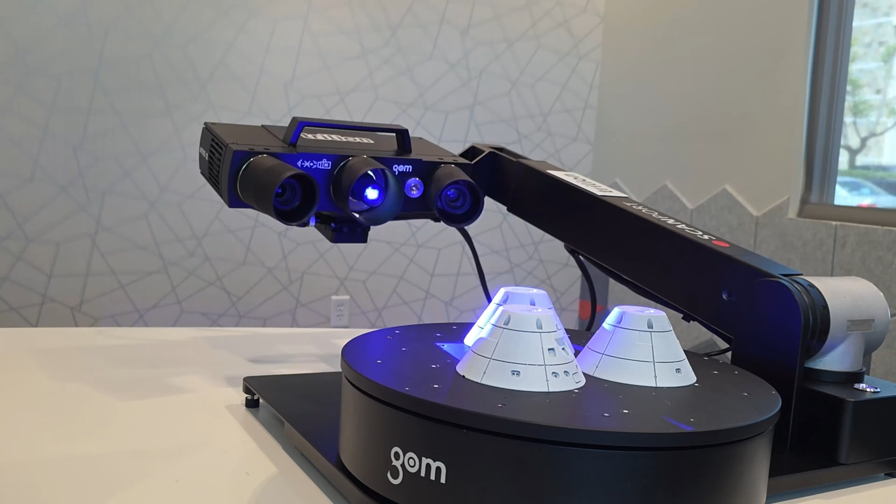Today we want to talk about scanning, specifically automation and scanning. In today's fast-paced manufacturing environment, whether you're in aerospace, automotive, or medical, time is one of your most valuable assets. We're going to look at a way to reclaim that by moving these processes to automation, from manual data capture to a semi-automated precision capture.

I want to give you a little background about Trilion as a company. Trilion Quality Systems was founded in 1998 by our founder, John Tyson. Our primary headquarters is located at the King of Prussia office outside of Philadelphia, but we have satellite offices all over the country, including the Great Lakes office and one in Seattle. At Trilion, our footprint spans the most demanding industries, from aerospace and defense to automotive and medical device manufacturing and materials. We try to help our customers solve their most complex engineering hurdles with a variety of different tools.

All of our optical metrology tools are completely application agnostic. We really don't care if your material is metal, composite, or biological, if the environment is a clean room, a high test heat cell, or a pad for an engine test fire. It doesn't matter, we will still be able to offer valuable insights with our methodologies.

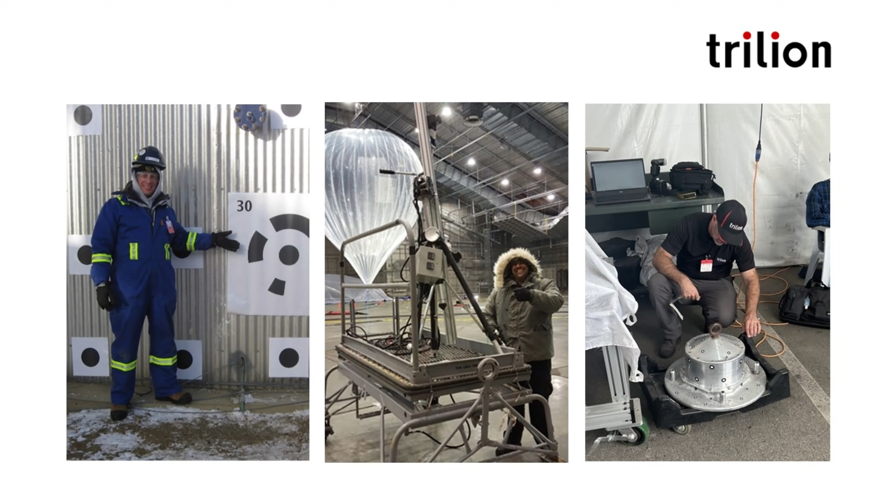In this case, a Trilion engineer will actually come on site with a measurement system, or they can use the customer's measurement system, and make the measurements on behalf of the customer, then provide the insights in a report with the data afterwards. This is a really useful setup for customers who are new to optical metrology and don't have the insights and training yet to get to the point where they can do it themselves.

The other way is with training and education. We really believe in empowering our customers as much as possible with everything they could need to get the most out of their systems and get the quality data and insights they're looking for to help solve their problems.

ZEISS has a very wide range of optical metrology-based tools. Today, we're going to be mainly focused on the scanning portion, but there are other areas that we focus on at Trilion, Aramis being one of them, which is the optical strain measurement technology.

Argus and TRITOP are both DSLR-based technologies. We see Argus used a lot for sheet metal forming analysis, often in the automotive industry. TRITOP is an optical CMM where you're creating a large point cloud through a large amount of images taken from different points with the camera.

CT scanning is an area that ZEISS is very active in. They come from large volume to very small volume, so it just depends on what the application necessity is.

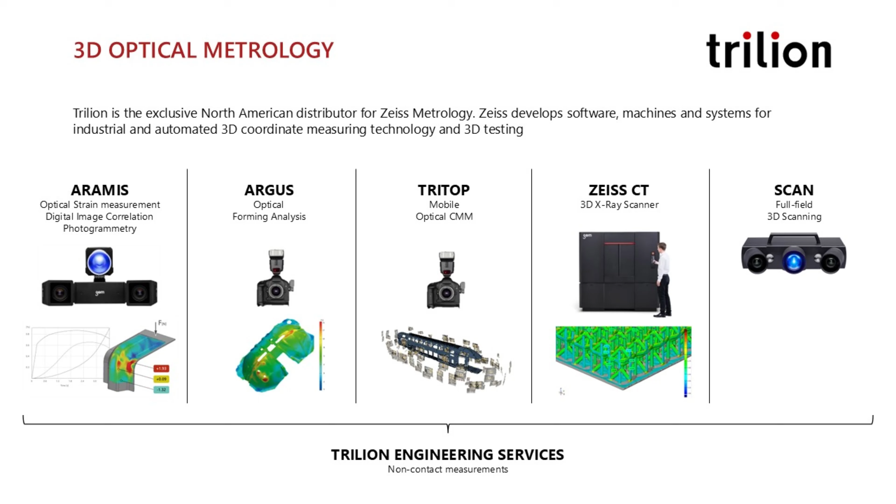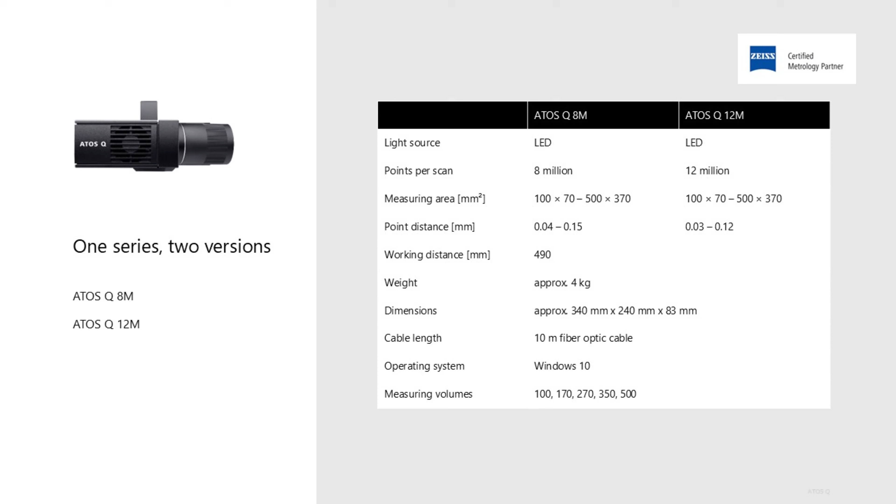The sensor we used for pairing with the ScanPort was the ATOS Q 12M sensor. This is the spec sheet. ZEISS also makes the ATOS Q 8M version. Both are excellent scanners for the half meter and under volume.

For the demonstration, we're going to be using three slightly different Artemis capsule models. Each was 3D printed with geometric variances from the others, so as to highlight the system's capability of differentiating those with the scanning.

With the capsule secured on the platter, we can initialize our measurement series in the software.

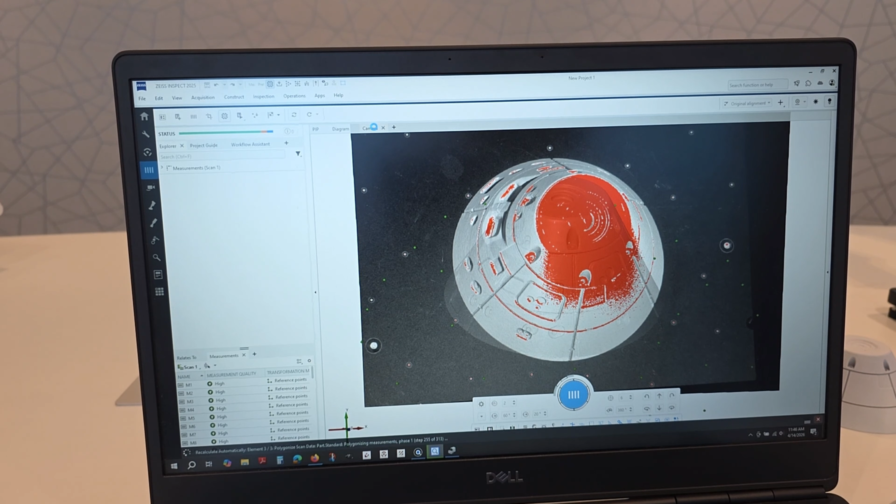As the sequence begins, the ATOS Q projects high-resolution blue light fringe patterns onto the part. The software automatically tracks the table's position using the integrated reference points, stitching each individual measurement into a global coordinate system in real time as it's doing this.

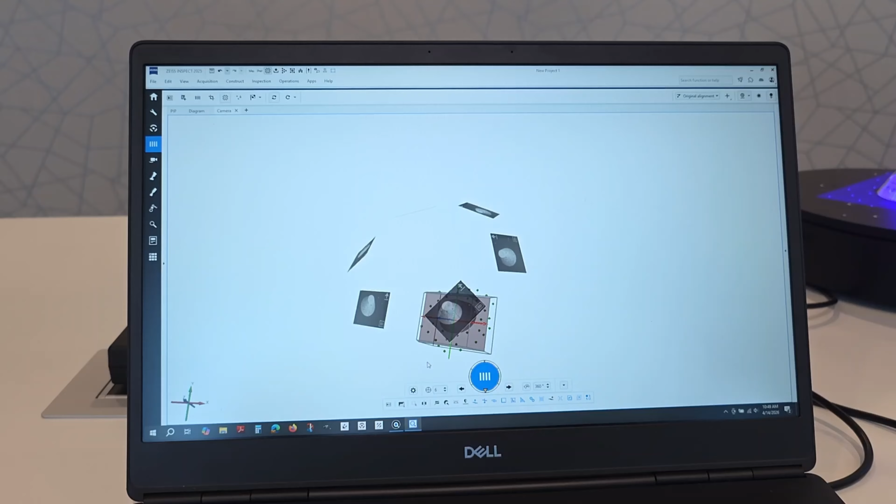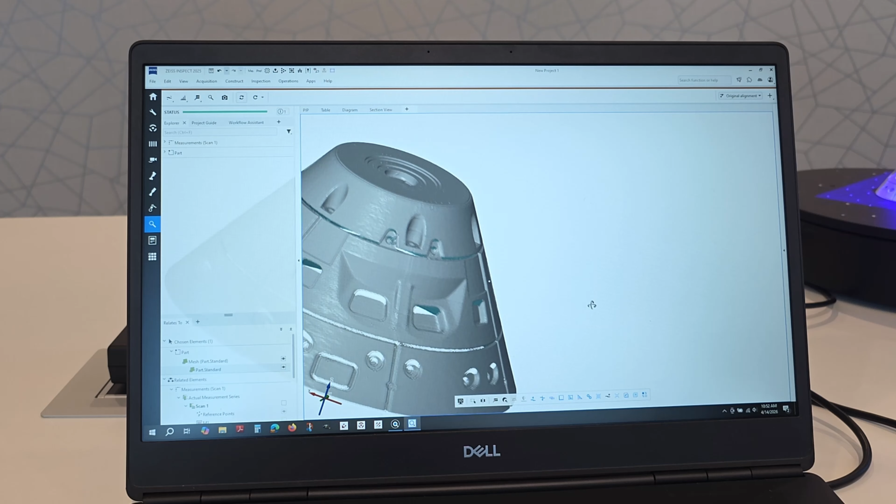Once the automated rotation sequence finishes, the software processes the raw data and instantly stitches all the individual views together into this clean, high-resolution gray mesh that you see on the first capsule. Viewing the part as a shaded gray mesh allows us to visually inspect the quality, and you can see how cleanly the Q captured all of the geometric details. All in all, not a bad scan.

With just the pairing of the rotation table with the scanner on the tripod, with basic automation, you have a great measurement coming out of that. But in order to get into the higher efficiency and higher throughput workflow, we want to bring in the ZEISS ScanPort. This is a new tool they have introduced.

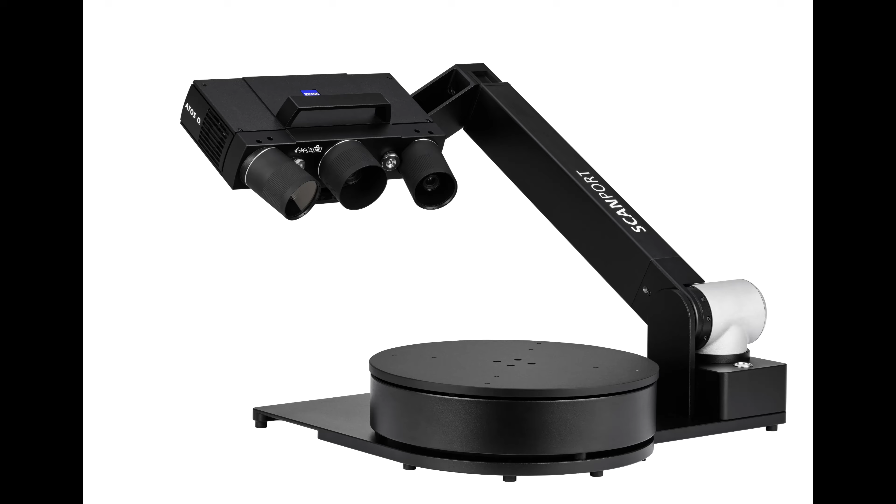This is a compact semi-automated system, and it brings three-axis desktop automation directly into the workspace. By combining the motorized rotation table and the motorized arm on the ScanPort, the arm moves up and down, it tilts, giving you the full three axes of motion. It moves the sensor to pre-programmed distances and angles automatically, and completely removes the need to manually build fixtures or angle the part that's being measured.

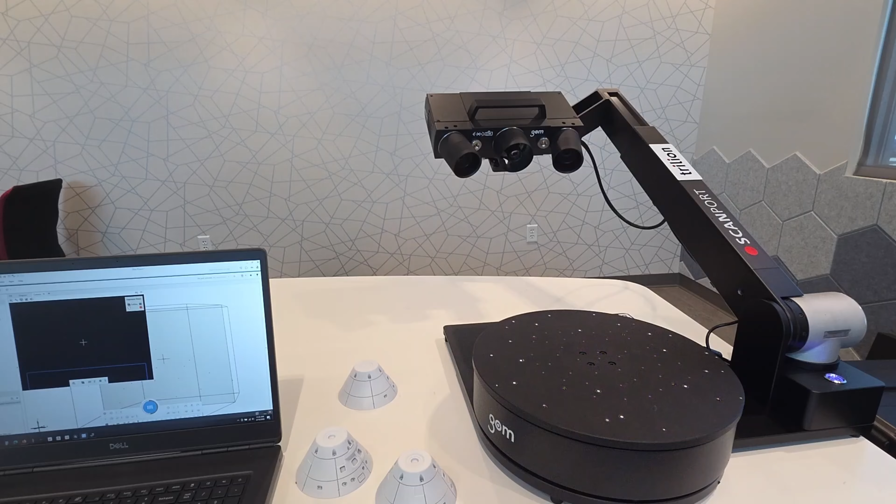Before introducing the first part to the workspace, we're going to create a coordinate map with the reference targets on top of the rotation table. The ScanPort automatically executes a three-axis motion path, moving the sensor through optimized tilt angles and heights. By scanning the empty table first, the system identifies and registers the exact spatial coordinates of each reference target without any obstructions from the part.

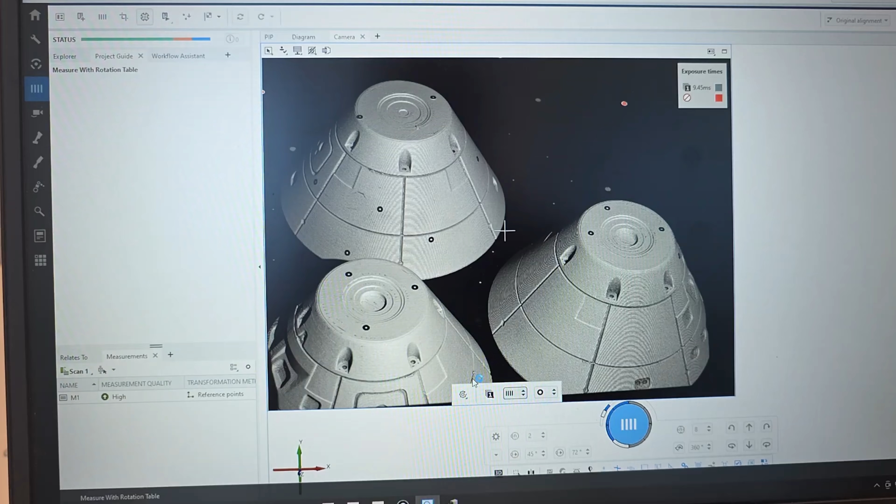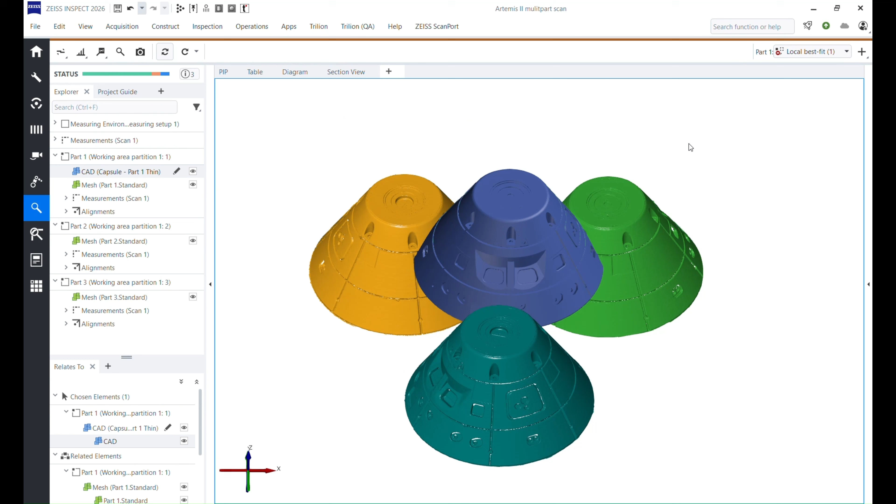Once we have all of the scanning completed of the three parts, we can begin to bring the meshes into the inspect space, using the STL files for each of the individual parts. Once the import is complete, the software designates the master STL file as our nominal baseline. With our reference data and all of our scan components successfully loaded into the same project workspace, we're ready to move directly into the part alignment.

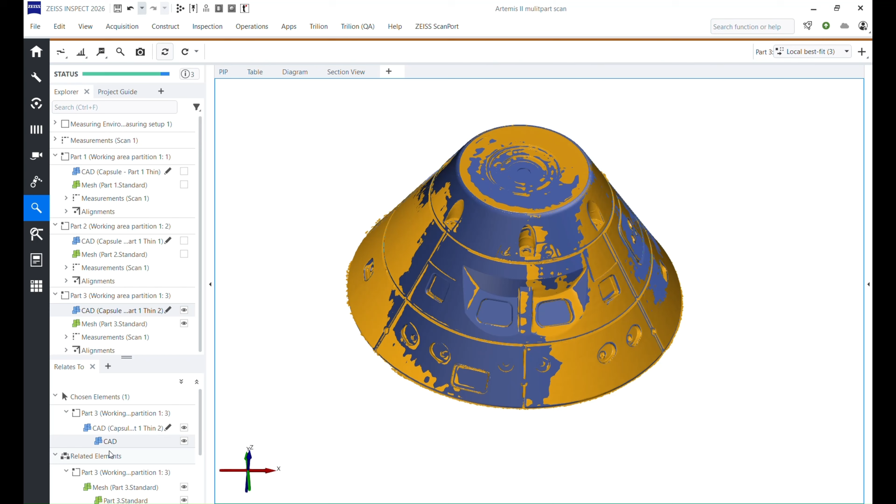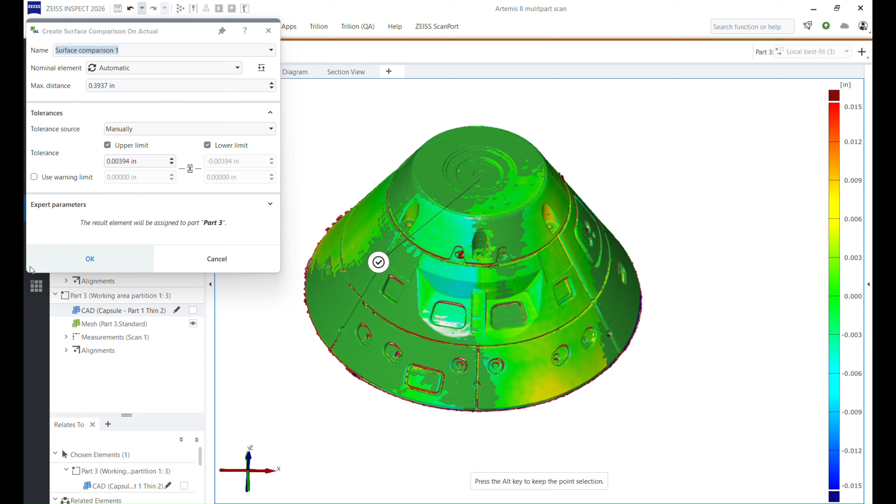With the alignment locked in, we can visualize the geometric differences between our scan part and the CAD. With our best fit alignment locked in, we can visualize the two meshes overlaid on each other, and now we can begin to add our deviation labels to the surface points of interest.

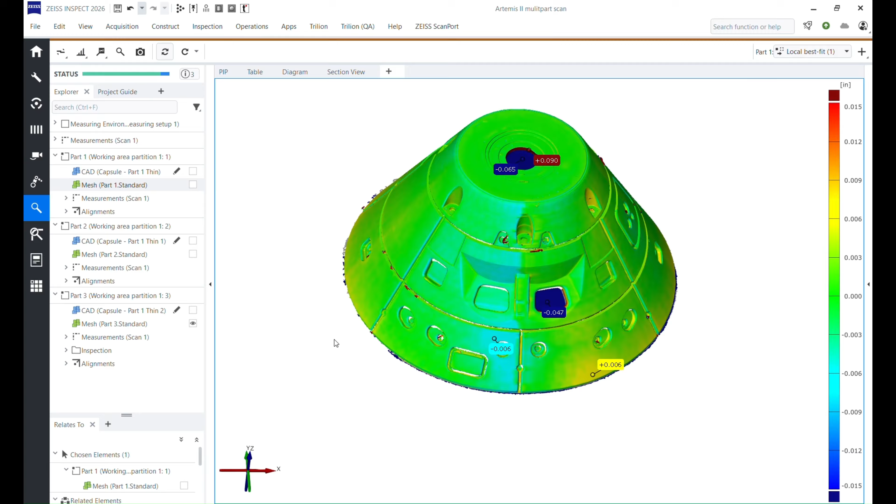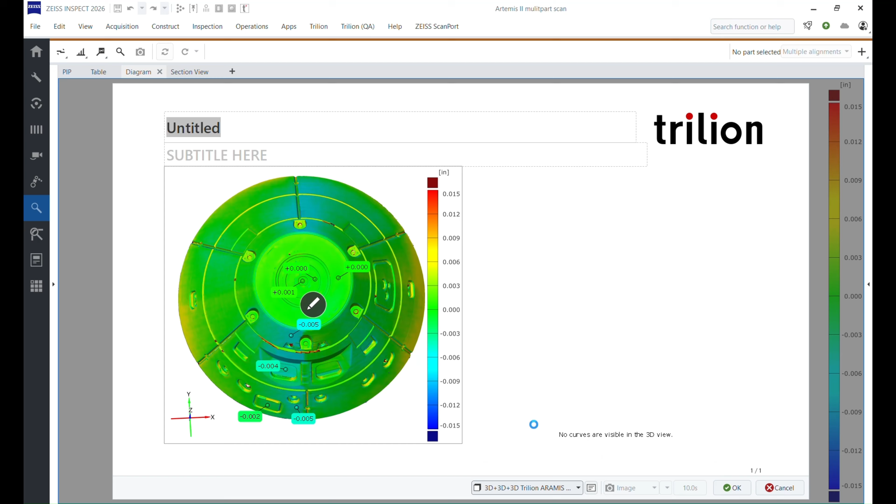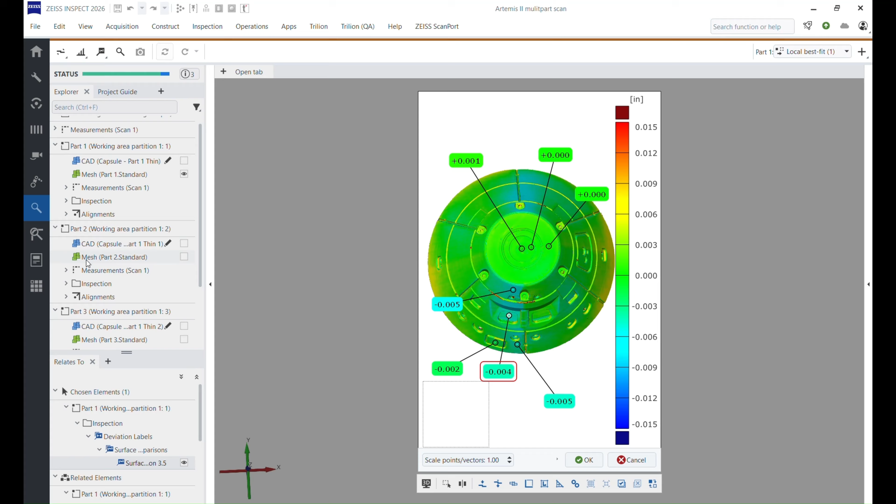Now that we've covered the topic of the ATOS Q used with the ScanPort for automated scanning processes in that context, let's talk about the T-SCAN Hawk 2.

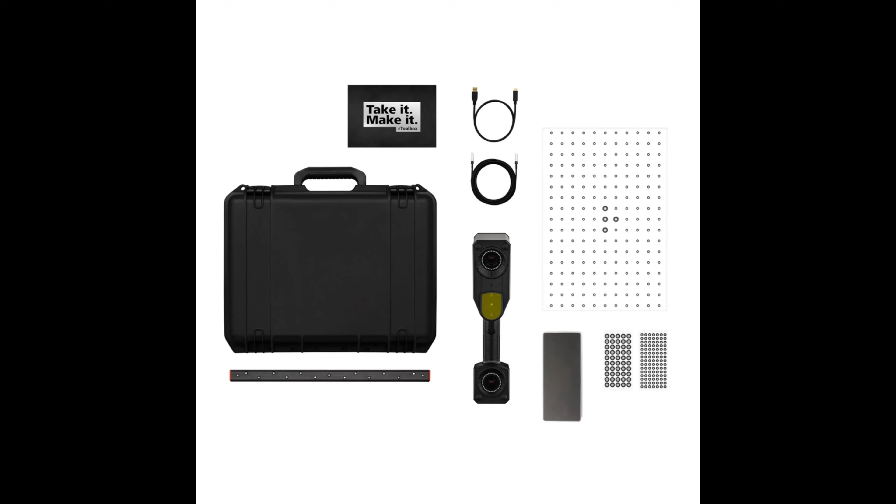This is a handheld laser scanner brought to the market by ZEISS. It's designed as a portable handheld 3D laser scanner, rated in volumetric accuracy down to 0.02 millimeters. This is a wired connection, but the weight of the sensor itself is under a kilogram, so it's very easy to move around for portability.

The Hawk 2 has a couple of really interesting features in that it is capable of doing photogrammetry, and for that, included is a pair of scale bars. Also included is the calibration object standard that is used for calibrating the sensor itself.

The calibration process is very straightforward. It's 8 image sequences that you take with different positions. It's not possible to calibrate incorrectly — it won't allow you to progress to the next step in the software. It's one of the really great benefits of working with ZEISS tools, that the calibration is very trustworthy.

To get further into the details of the T-SCAN Hawk, I'm going to bring on Jerem Hatch, who is one of our senior applications engineers for the West Coast team.

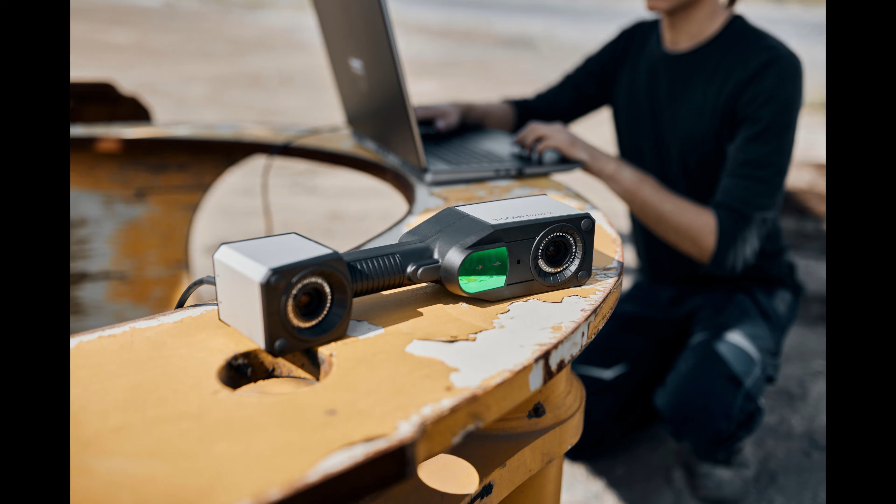For this next section, my name is Jerem Hatch. I'm a senior applications engineer working with Walter on the West Coast, and I will be giving a hands-on demonstration using the ZEISS T-SCAN Hawk 2 in the ZEISS Inspect optical 3D software.

First, with a new instance of ZEISS Inspect Optical 3D open and with the T-SCAN Hawk 2 plugged in and powered on, I will first check our connection. Next, I will start a new project, and as you can see, the software automatically opens the T-SCAN Hawk 2 workspace on the left side of the screen.

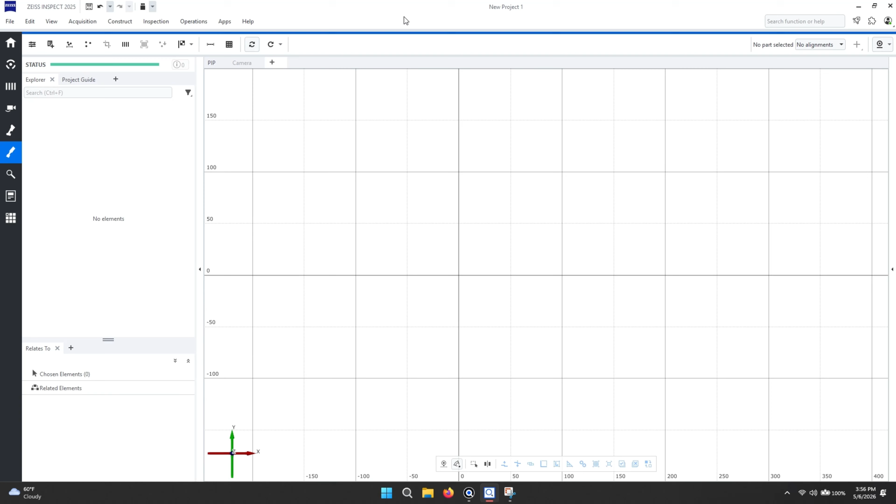The back of the T-SCAN Hawk 2 has 4 physical buttons that can be pressed to navigate through a predefined kiosk mode. To initiate the kiosk mode, I will initially press the right arrow button while in the new project. This mode simplifies much of the software interface and starts to guide the user through the scanning process.

Using the arrow buttons on the back of the unit, I'll start by selecting the type of scanning template. In my case, there are no reference points on the propeller sample itself, but there are points around it, which we will use for the scan. You can see some of the other options, including something called satellite mode for large parts. I can also choose the initial point spacing that will be used for the scan mesh.

Choosing this template, we can see new options available, including the option to use the hyperscale bar included with the system for a quick recalibration if needed.

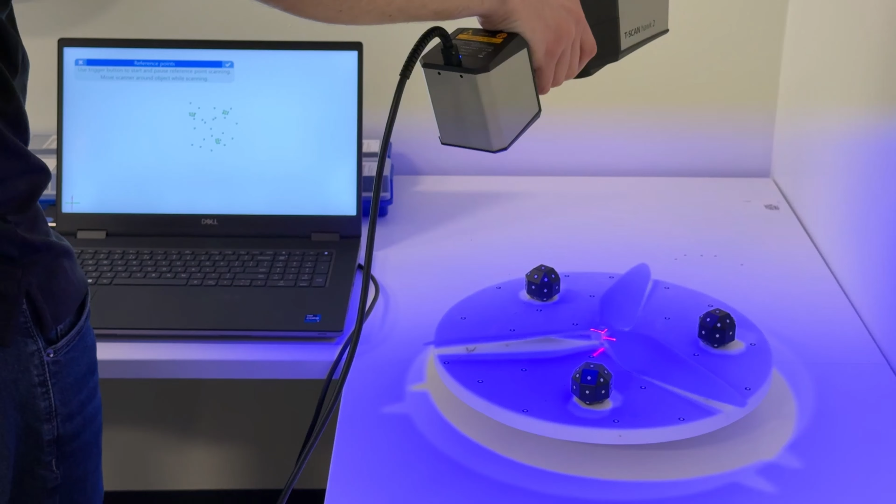We need to capture our reference points, which are the points currently on the rotation table and on the monuments around the propeller. I'll enter the current temperature of the sample and click the trigger button once on the T-SCAN Hawk 2 to initiate the point cloud scan of the reference points. You can see that the T-SCAN Hawk 2 projects two laser lines that overlap to form a cross when at the center of the measuring volume. This is the distance at which you will typically scan.

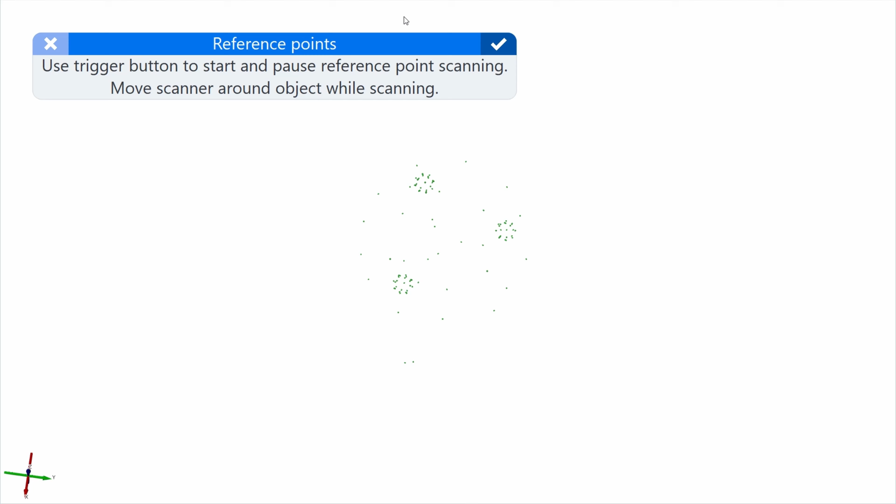Once I collect all the points, I can click the trigger button again to stop, and the right arrow to save that point cloud. I'll then be prompted to define a background plane, and in my case, the reference points on the turntable will make a nice plane to define where my scan area should stop, so I limit the amount of background data captured by the scan.

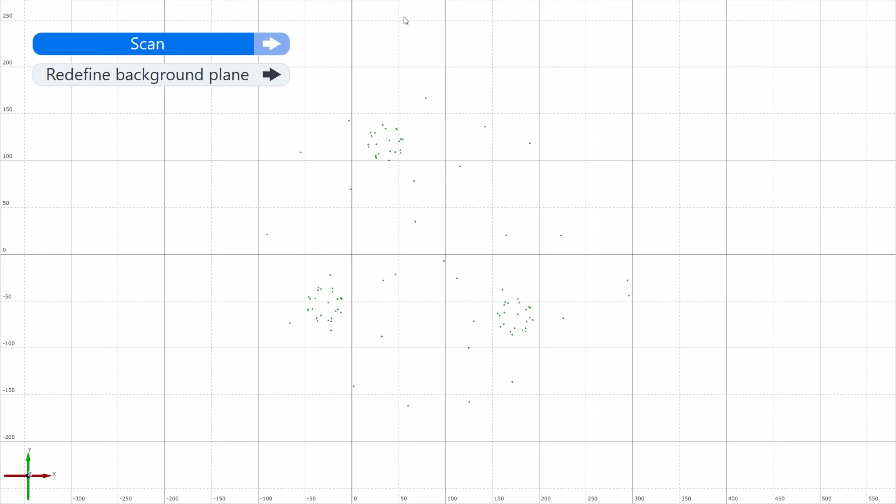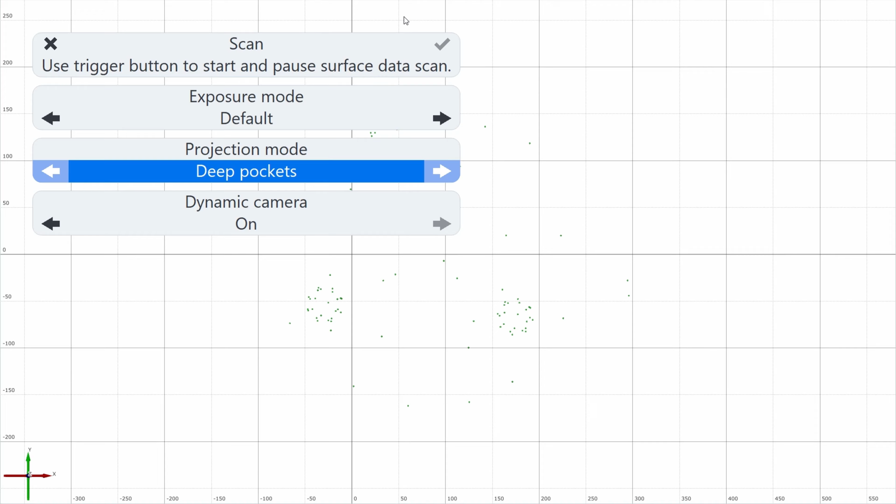Next, I'll move into scanning, and here you can see a few different options: one for exposure mode, which has a default setting, one for dark or shiny surfaces, and another for bright surfaces. Next is the projection mode, typically set at default for surface scanning, and also an option for deep pockets such as through holes for bolts or other cavities. You can typically scan depths of about three times the diameter of the opening. The last option is the dynamic camera, which gives you live visual feedback of where your T-SCAN Hawk 2 is looking relative to the position of the part.

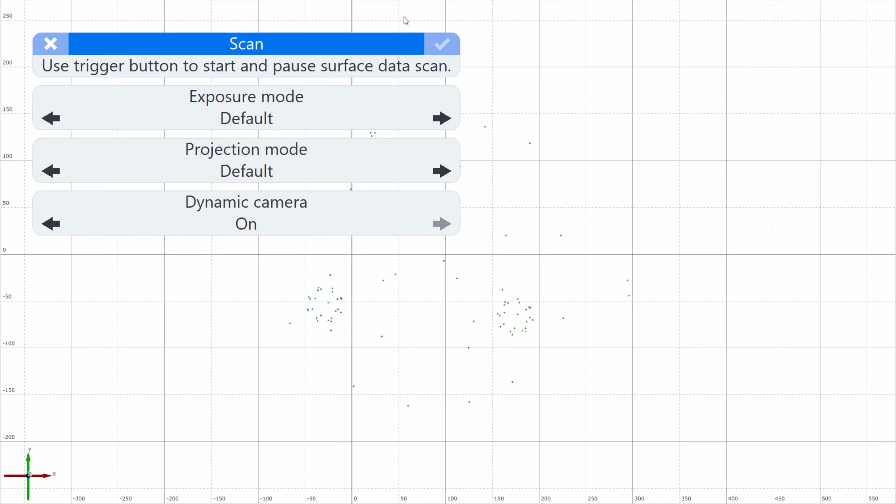Next, I'll move up to scan, and when ready, I'll press the trigger button once to begin scanning. You can see the laser projection lines of the T-SCAN Hawk 2 and the current state of the mesh in the live view of the software. I'll move the T-SCAN Hawk 2 slowly around the part, building up my mesh until I have the appropriate scan density required for my analysis.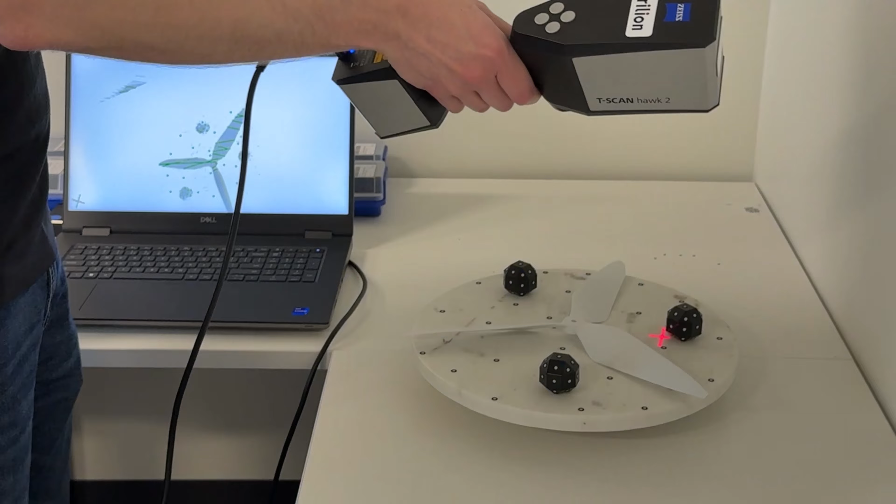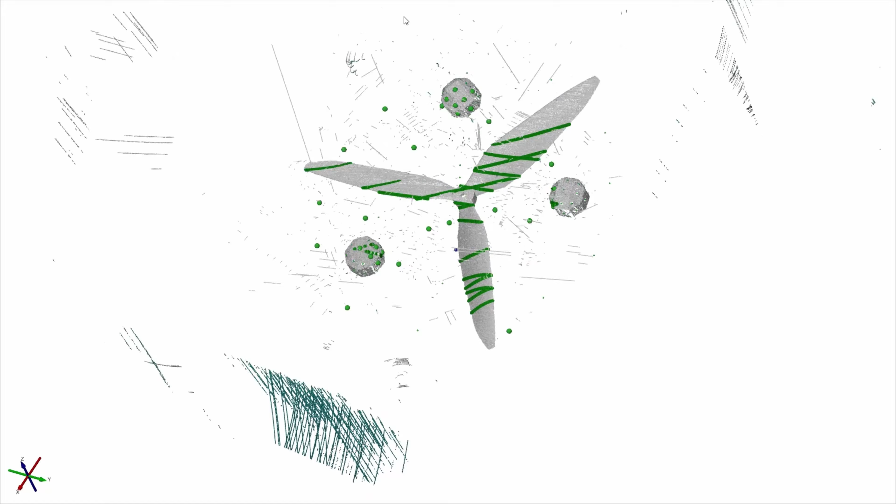You can see a few scanning artifacts from the background are still being picked up. Once I complete my scan, I will trim those out of my project. Now I'm going to use the Deep Pockets projection mode to try and get some more scan coverage inside of the attachment hole of the propeller.

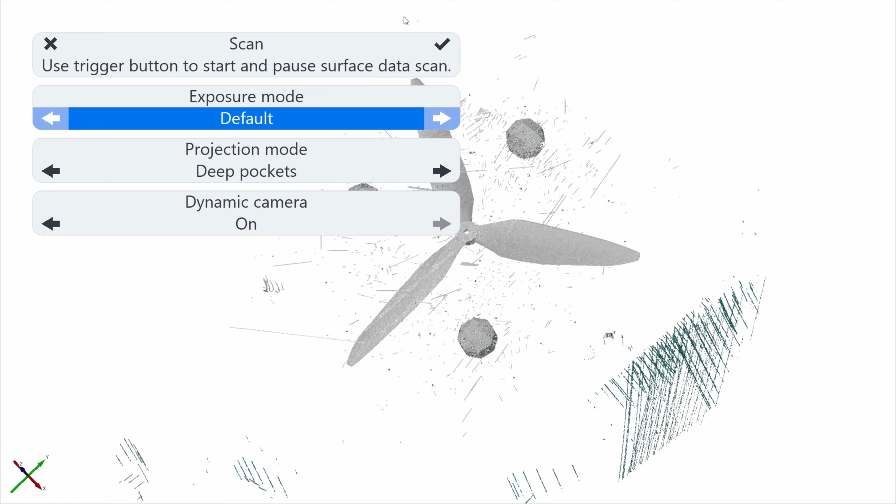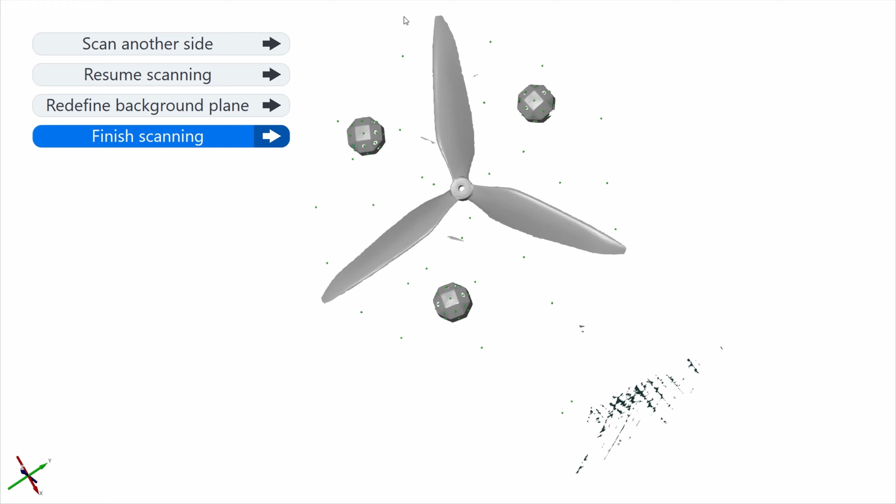Once I'm happy with my scan, I can use the right arrow on scan to finish. Here you can see I can either choose to scan the opposite side of this propeller, resume my current scanning process, redefine my background plane, or finish the scan. I'll go ahead and finish my scan, and you can see I have the option for post-processing this mesh, polygonization, with a few different options.

Here I'll use standard, and I'll choose to fill any of the reference points locations with mesh data. Once the polygonization is complete, I can again scan another side, resume scanning the initial process, redefine my background plane, or continue with the inspection in the software.

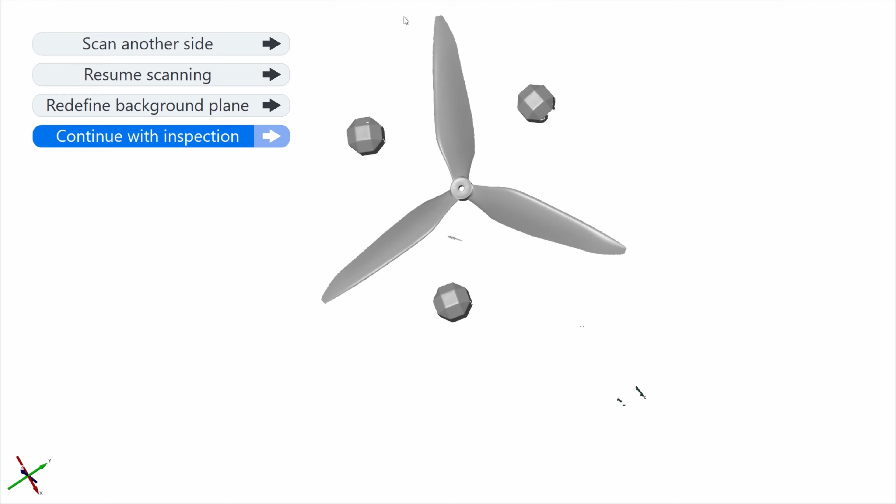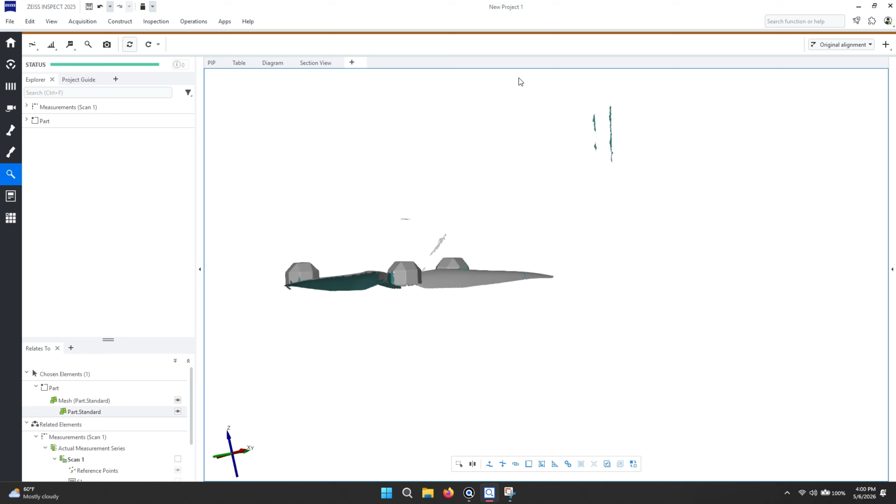Once I return to the software, we're now in the inspection workspace where we can do comparisons to CAD data. We can look at cross-sectional geometry, create geometries such as fitting planes or fitting cylinders. But in my case, I've noticed some finer details on this propeller that have not been captured with the initial mesh point spacing. But first, I'm also going to trim out any erroneous mesh data picked up from the background during the scan.

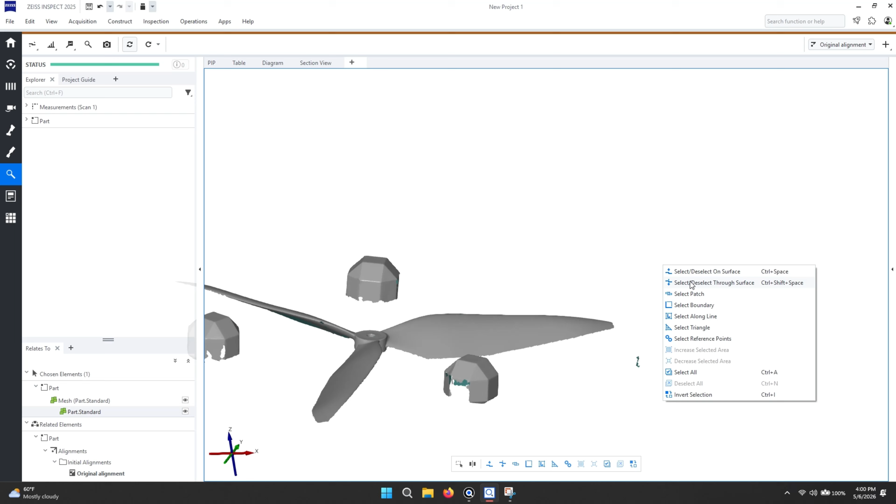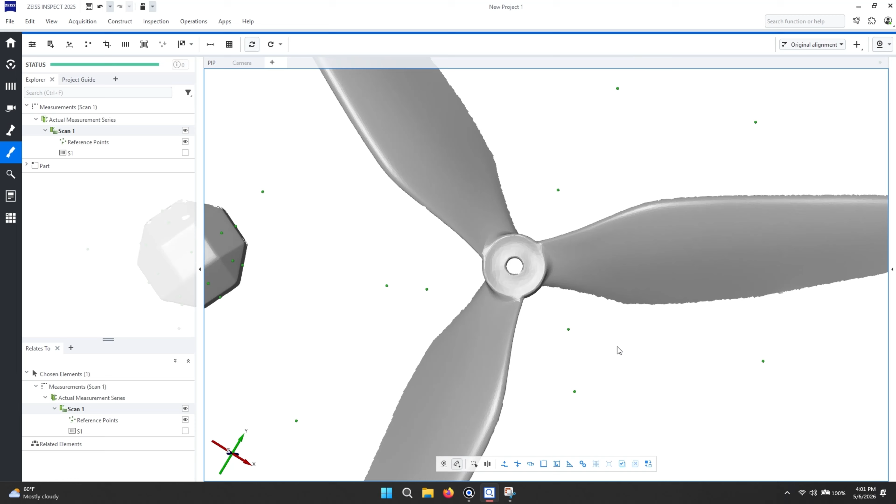To increase the detail of my scan in certain locations, such as for the serial number or the logo of the propeller, I'm going to go back into the T-SCAN Hawk 2 workspace, and I'll choose this button here for Scan Details, which allows me to decrease the point spacing by a certain factor, and also select the area I want to rescan at that higher detail, then begin scanning.

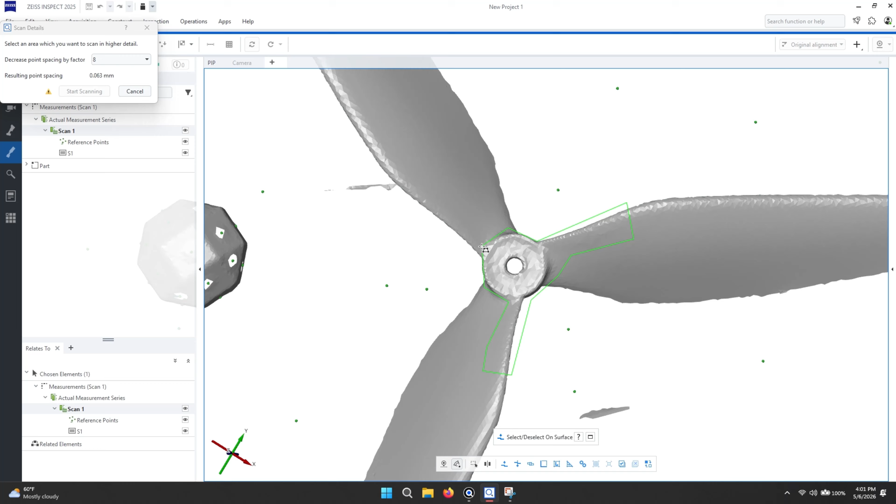Here again, I can choose exposure modes and projection modes, and I'll just bring the T-SCAN Hawk 2 back into position, press down on the trigger once, and begin scanning and filling in that area with higher resolution data. Once I'm done, I'll go ahead and click Finish.

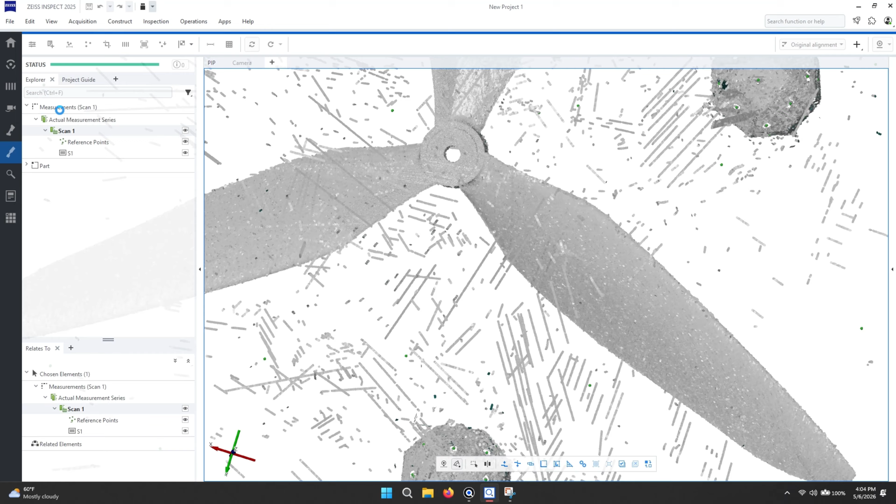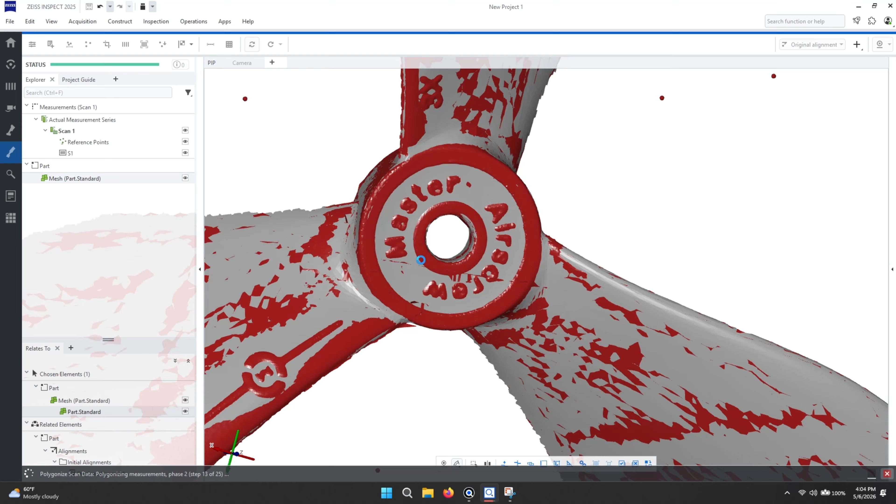Now you can see some of the higher details that were missing from the initial scan that I was able to go back and scan in finer detail. To finish up this project, I'll polygonize the mesh, and now you can see the nice polygonized mesh here showing off some of the raised lettering on the surface of the propeller that I was able to capture with the finer detail portion of the scan.

So many thanks to everyone for attending today's webinar on scanning automation using ZEISS tools. The value of adding automation to these systems centers a lot on precision and consistency. By automating these measurement paths, you're removing operator error, accelerating inspection cycles, and ensuring repeatable data collection directly into your quality management systems. So it's very valuable in that sense.